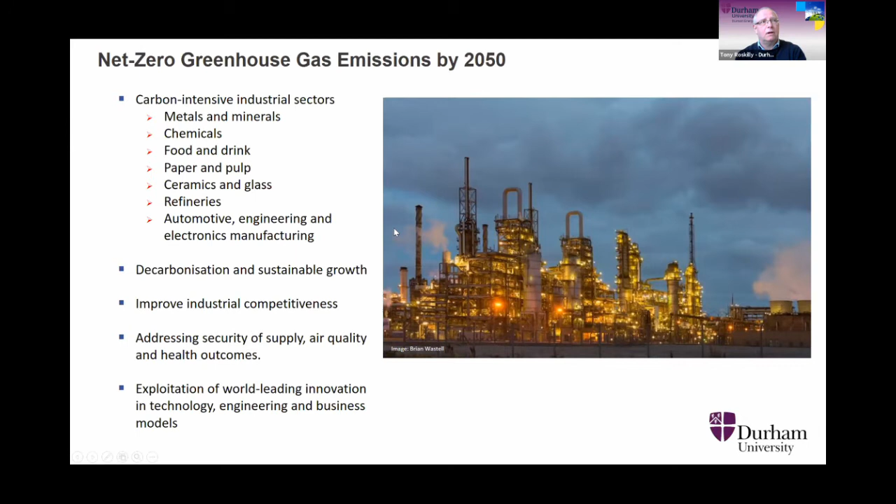Over the next decade, there needs to be a significant switching to alternative energy sources and vectors. This will include greater use of renewable electricity and greater electrification of production processes. There will be the prospect to exploit solar and geothermal energy and the switching to hydrogen and other hydrogen carriers, such as ammonia, biomass, and synthetic fuels.

The UK government aims to encourage around 20 terawatt hours to be switched to low carbon and zero carbon vectors by 2030. Although there have been significant improvements in energy efficiency and reducing energy demand over the last few decades, there is still much more that we can achieve.

There is a huge opportunity to recover, store, and use waste heat, for example. The use of this heat can be facilitated by thermal storage, and in particular benefiting from advances being made in latent and thermochemical storage. This heat can be used to generate electricity using low temperature thermodynamic cycles, or produce cooling, or be thermally upgraded to higher and more useful temperatures. Heating and cooling networks can be used to provide energy services elsewhere.

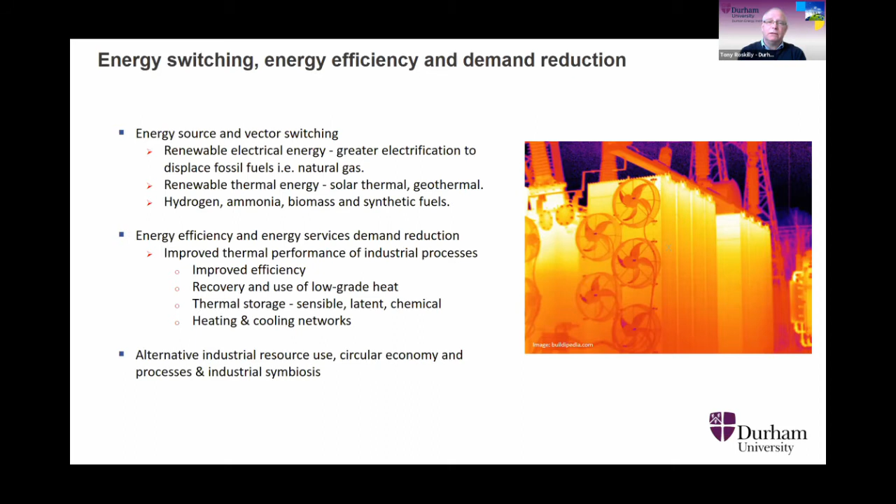There's also the need to switch to alternative low carbon feedstocks and alternative industrial processes so that we can take advantage of the circular economy, which was mentioned earlier, and the energy vector switching. We also need to build on industrial symbiosis that already exists in our industrial clusters, and to extend the use of byproducts and waste as feedstocks for others to use.

Hydrogen is particularly a focus since it is similar to burning natural gas in many respects. It produces no carbon emissions at the point of use, and it is possible to achieve flame temperatures of 2,100 degrees C when combusted in air, or even 2,800 in oxygen.

Electrical heating options are able to achieve around 1,800 degrees C and can take advantage of zero carbon electricity. The advantages of electrical heating methods are that they can provide controllable and precise heating, greater temperature flexibility, and the potential to require less maintenance. However, they often require very expensive changes to production processes.

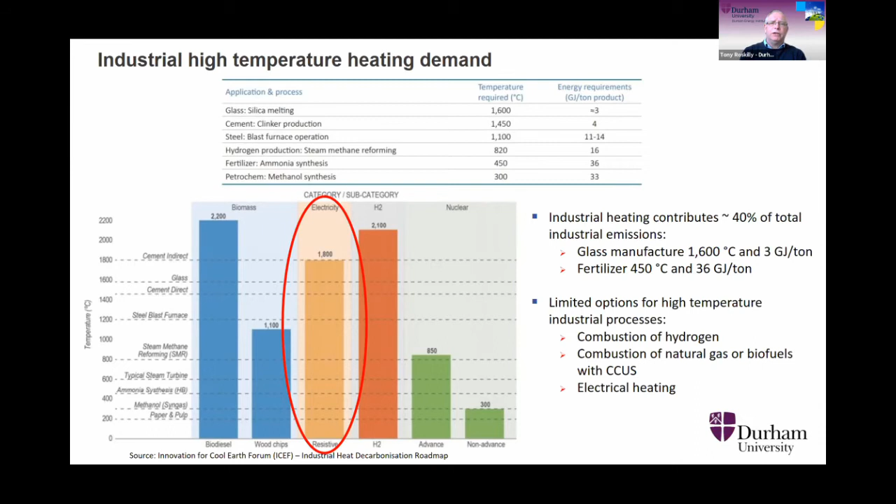The UK industry accounts for the equivalent of 72 million tons of CO2 per year. That's about 16% of the UK's greenhouse gas emissions. Globally, it's about 24% and still growing. And it is not straightforward to decarbonise.

It's not possible to change all plants at pace because of disruption to production and the massive capital investment involved. And some current processes aren't possible to decarbonise completely. Therefore, carbon capture, utilisation and storage, CCUS, must be deployed to prevent atmospheric emissions.

CCUS is vital, and the UK government is supporting the drive to capture and store around 10 million tonnes of CO2 per year by 2030. The UK has an advantage in its geology, and there are opportunities to store vast amounts of captured CO2 offshore in the North Sea and the Irish Sea.

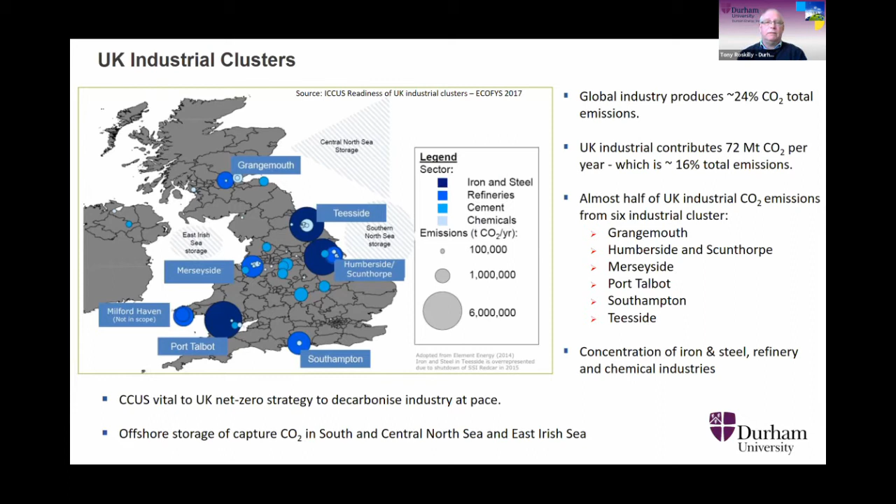Durham Energy Institute has been working with all the industrial clusters, but in particular Teesside. Teesside focuses on chemical, petrochemical and bioprocessing, and is the most compact and integrated of the 6 major industrial clusters in the UK. It covers less than 200 square kilometres and has fantastic integrated infrastructure across the whole site. Therefore, it's arguably the most suitable to be the first to transition to net zero emissions.

The current UK government goal is to create 4 low carbon clusters by 2030, with at least 1 completely net zero by 2040.

The yellow lines on the cluster map show pipe corridors which interconnect the individual industrial companies operating within the cluster. This infrastructure supports industrial symbiosis, facilitates the integration of CCUS, and allows the distribution of hydrogen across the site. Teesside also benefits from very close proximity to offshore CO2 storage and offshore wind in the southern North Sea.

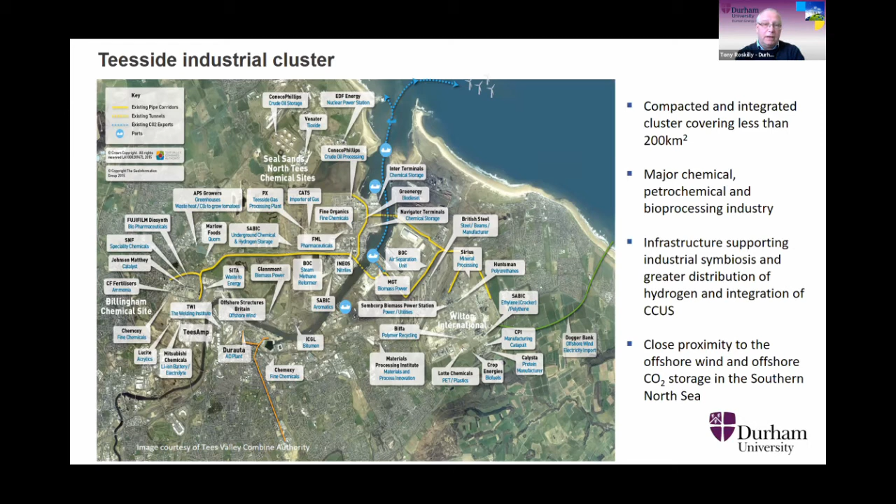CF Fertilizers has an integrated production and storage facility for ammonia and nitric acid, supporting chemical processing companies across the cluster and producing fertilizer. To get a sense of the scale, I've been told that this uses the same amount of natural gas as Manchester.

SABIC is Europe's 2nd largest ethylene cracker and the world's largest low-density polyethylene plant. Hydrogen is a byproduct from their production processes, and they have now made fuel switching modifications to use hydrogen instead of natural gas to provide heat across their plant.

The BOC steam methane reformer produces around 32,000 tonnes of hydrogen per year to supply industrial operations across the Teesside cluster. This is distributed by around 70 kilometres of hydrogen pipelines. Through the Net Zero Teesside project, it is planned to integrate carbon capture to this plant and build additional large-scale reformers to produce blue hydrogen. There are also plans for large-scale electrolysis on site to produce green hydrogen.

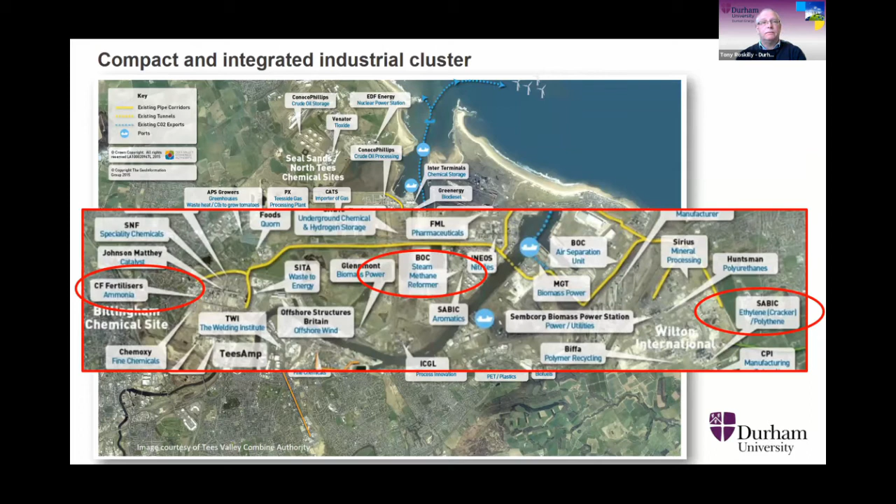The Net Zero Teesside is a CCUS project led by BP, who are working with ENI, Equinor, Shell, and Total. The aim of this project is to exploit the existing pipe infrastructure and the large industrial companies who are keen to decarbonize on Teesside.

Both existing hydrogen and ammonia productions on Teesside provide high concentrations of CO2 as a byproduct, about 1 million tons per year, so it's very cost effective to capture, utilize, and store. This creates the opportunity to produce large amounts of blue hydrogen and blue ammonia. There is something like another 6 million tons of CO2 per year produced on site, which can also benefit from the Net Zero Teesside project.

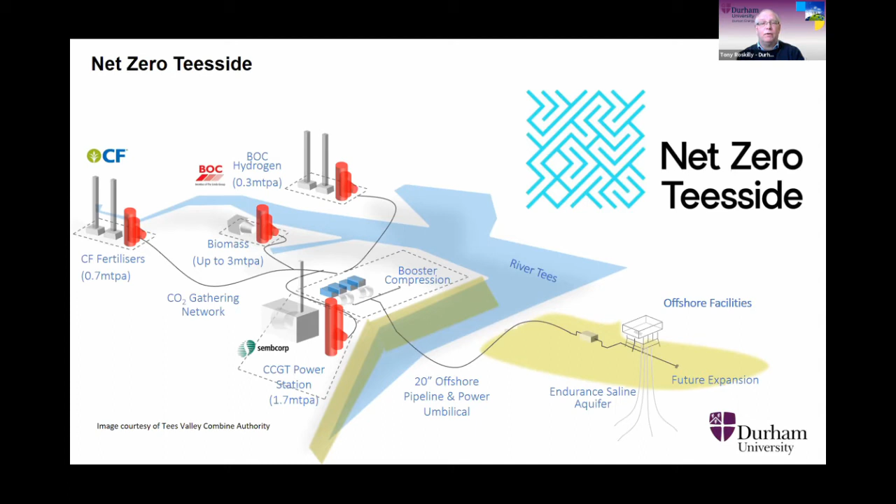In addition, a new combined cycle gas turbine power station is to be built, and its CO2 will be captured. Storage of the CO2 will be through compression and dedicated pipeline to the Endurance saline aquifer, which is around 145 kilometers offshore.

I'd like to briefly mention a few projects which Durham Energy Institute are conducting, which relate to industrial decarbonisation. We are exploring a number of routes to utilize captured carbon. One example is a new pathway for the production of PEF, a replacement for polyethylene terephthalate material made from using waste biomass and captured CO2 from other industrial processes.

We are exploring the production of hydrogen and chemical feedstocks by the controlled anaerobic fermentation of biomass waste streams. We are also developing biomass gasification technology with integrated carbon capture to produce hydrogen and synthetic fuels.

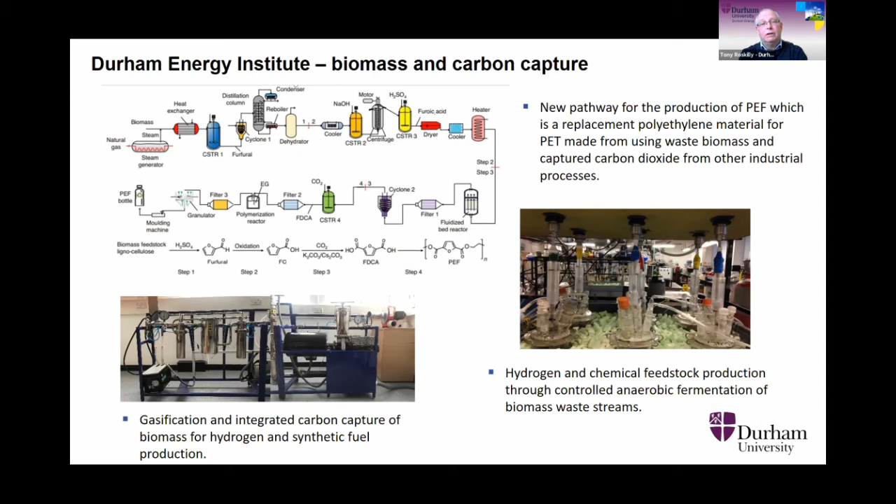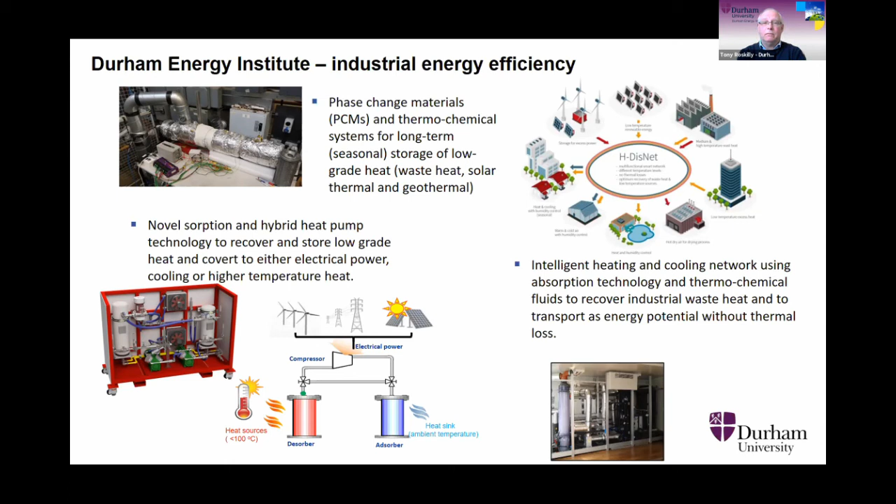Also, we have been developing phase change materials and thermochemical systems for long-term storage of waste heat, solar thermal, and geothermal energy.

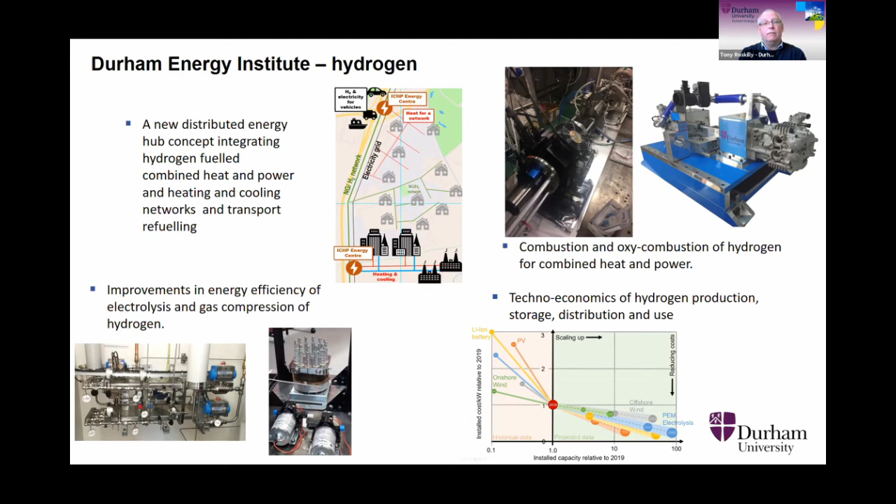These are just a few examples of the type of work that Durham Energy Institute is currently involved in. So to summarize, industry accounts for around a quarter of all of the UK's greenhouse gas emissions, and more than two-thirds of these emissions come from our energy intensive industries.

So it's pretty clear that whichever energy system pathway we take, greater electrification, the use of hydrogen, CCUS, they'll all play an important role in industrial decarbonisation and our net zero ambitions. I think the key challenge is to do this whilst we can increase our international competitiveness.

There's a lot of changes already happening. There are huge programs of research and development and a lot of demonstration projects tackling industrial emissions. But this work must be urgently accelerated if we're going to meet our net zero commitments.

And the next 10 years are crucial, and we must get on with it. So with that, I'll finish and thank you for listening.